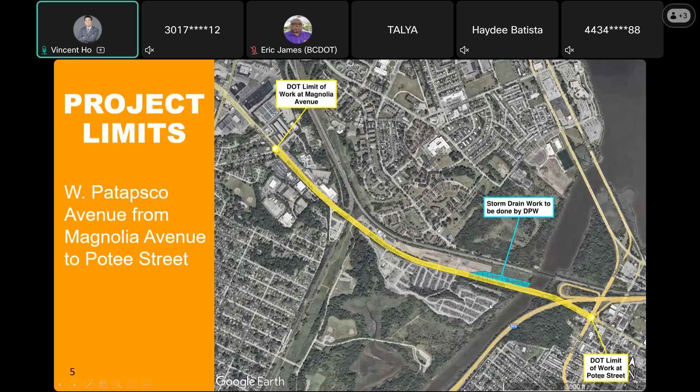There's a sister project being done by Public Works, just off the right of way - they're putting in a storm drain and an outfall, and we'll be connecting to that. We'll talk more about that later. That's off the city right of way, so it won't be part of the DOT project. But also included in that project limits, Public Works has a water line replacement that'll be accommodated into our project as well. The reason we do all this work at once is so we don't tear up the road three times, with three different construction phases and three different construction times.

The purpose and need: like I said, the basic purpose originally was to restore the concrete - there's a lot of joint problems and sometimes potholes. We also know there are drainage problems out there, and there's a new water line we're going to make sure can be built with our project. Also, when we were out there, it was obvious there was a need to accommodate pedestrians, but typically there's nowhere for them to go. We were going to accommodate them anyway, and then the complete street ordinance and design manual came out.

So that gave us tools to enhance what we were going to be doing. And of course, this road is on Baltimore City's master plan, it's on our bike master plan. So because of that, we want to accommodate bicycles. Anybody out there right now would know this is not a place where you'd want to ride your bicycle. We see people doing it from time to time, but there's a lot of fast speeds out there and it's not a protected space.

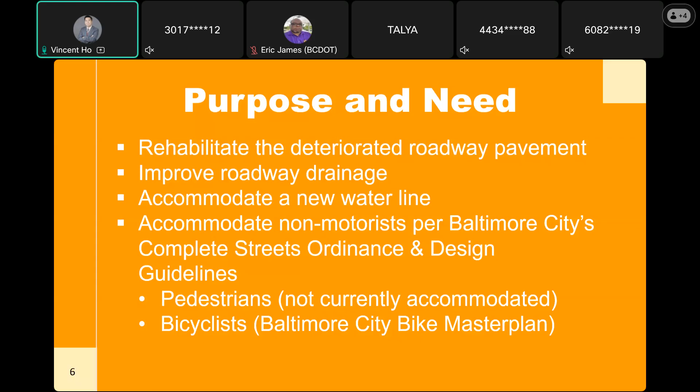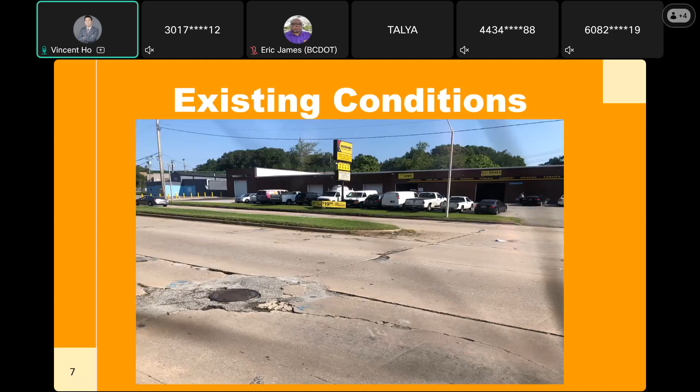So yes, we do know about the conditions. A lot of these photographs were from a couple of years ago. Again, that was the original purpose, was to restore the bumpy ride out there. This road was built in the early 60s, so it's like 60 plus years old right now. And we know the problem's just going to keep getting worse. So here's another problem, because these roads go downhill, they just get worse over time.

As you can see here, there's no pedestrian facilities. So somebody's either going to walk in the street or they create these little cow paths. Sometimes you do that if you have to, but it would never accommodate somebody in a wheelchair like that. So anything we put on, we want to make sure people with disabilities can have full access to the road as well.

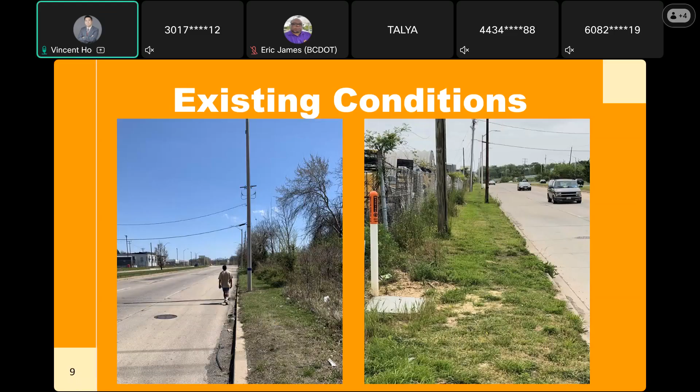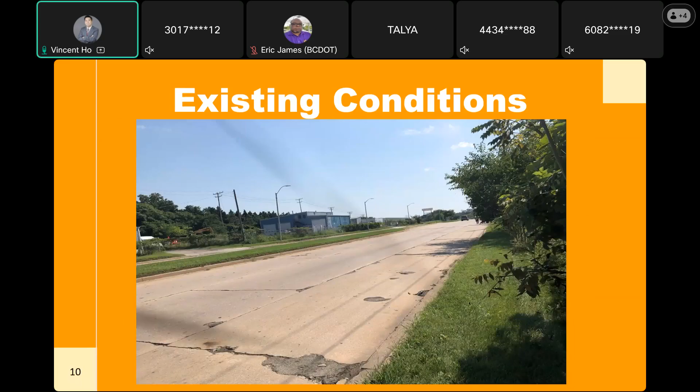So this is just another picture of the existing conditions here. When I was out there recently, talked about getting worse, there was some pavement upheaval on the eastbound farmost right lane between the light rail bridge and the bridge over the water.

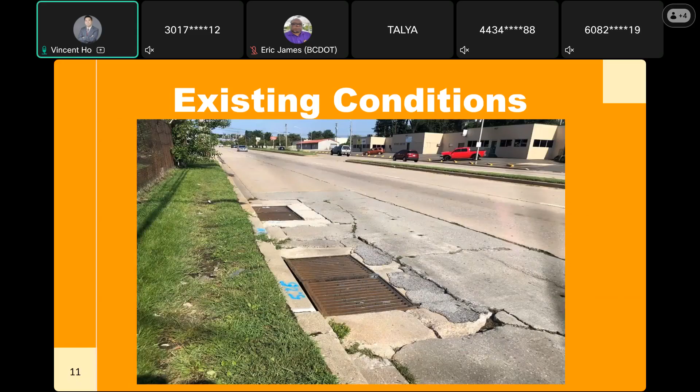Yeah, so that previous slide, you don't have to bring it back, Jamie, but yeah, it's a large part of our project will be adding storm drains, repairing storm drains, improving the drainage out there.

And here's another existing condition. There's an MTA bus stop right here, and there's absolutely no pedestrian facilities. So we're just dropping people off in the middle of nowhere. So we will work closely with MTA to make sure that we can integrate our sidewalk with their bus stops, because we don't want to leave anybody stranded.

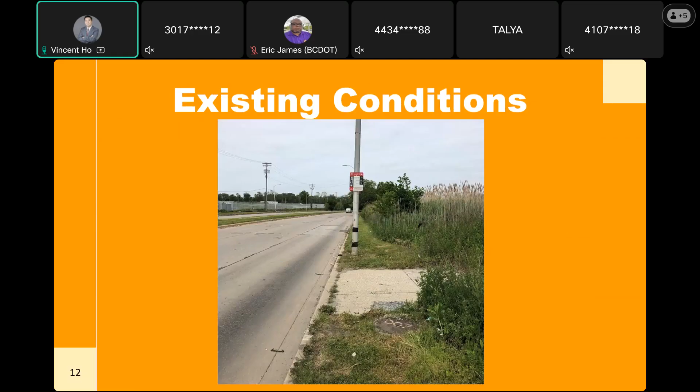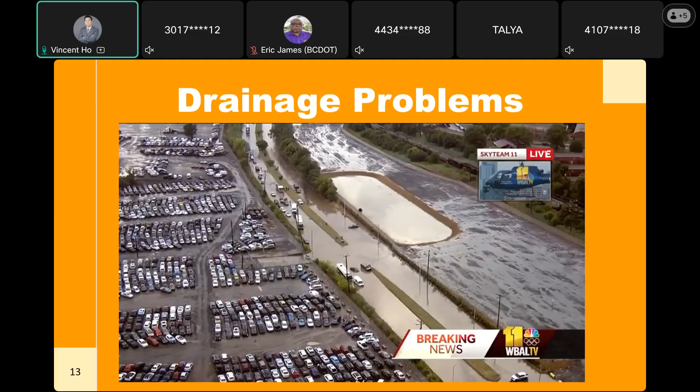All right, so the road was in the news not too long ago, but not for good reasons. There was a backup here. There's flooding that occurs from time to time, and that's a result of the existing road not having enough drainage, as well as there was an outfall that much of the road was draining to that has failed, and that was part of the reason why Public Works will be doing their own storm drain improvement project and sending the water to the Patapsco River.

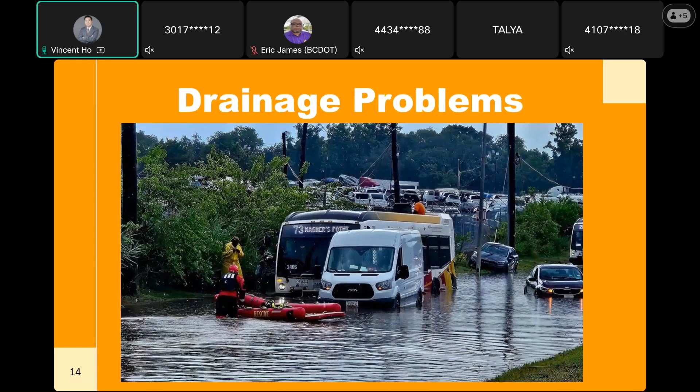And this is just like a worst case scenario, what happened earlier. They got the rescue out there and the water looks pretty deep.

So a couple of years ago, MTA installed a partial signal, and the purpose of this was for safety of their buses exiting the light rail station. But during our project, we will complete this so that it'll be an intersection that will accommodate traffic coming in all directions, as well as pedestrians. This really doesn't do it. There's no pedestrian facilities right here because there's not that much of a need, and it's really not accommodating people wanting to cross the road here.

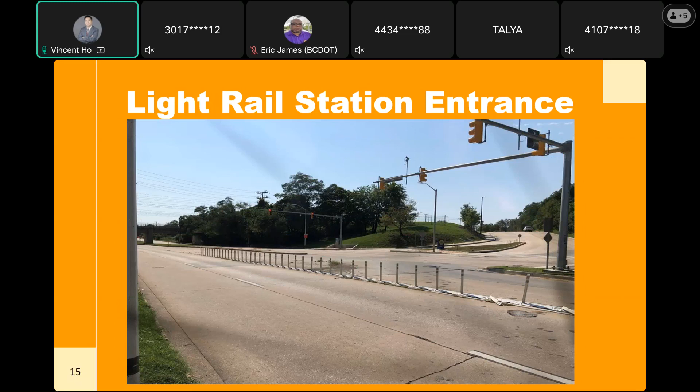All right, so the project says concrete pavement rehabilitation. Rehabilitation means repairing, replacing, modernizing, and sometimes upgrading. So that's kind of an all-inclusive word. And then beyond that, we're doing work often with the curbs where we can keep things in place, we'll do that. But then we'll be adding some street lights, some guardrail modernization, inlets.

I was talking about that - the ped lights, pedestrian lights in the commercial area. The commercial area is, as we define it, the area that's west of the light rail entrance. So there'll be some ped lights put in there, like the acorn lights, because that part of it, the adjacent land use is different. The rest of the project is more industrial or just undeveloped.

And then, like I mentioned earlier, the traffic signal at the light rail station, that's going to be completed. And then we'll do everything we can to accommodate pedestrians. There's going to be a shared use path that's going to be about 10 feet wide that accommodates people on scooters or bicyclists or people just walking, etc. And then that'll also be separated from the main part of the road. STV will show later a typical section of how that plays out, so there's some separation between where the road's going to be and where the pedestrians and bicyclists are.

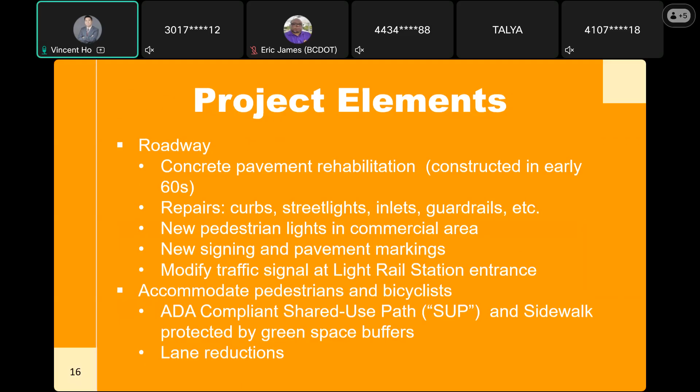All right, so this job has a lot of, it's a big team here. There's a lot of coordination going on.

I mentioned earlier, DPW has a major drainage system, and this is going to be similar to the project they did over in Cherry Hill, which is like a sister project for them, as well as Public Works is also replacing a 20-inch water line that runs down our project. And then MTA hopes to put in a pedestrian bridge at the light rail crossing.

So to facilitate people coming back and forth, because now I think some people actually cross on the tracks and we want to improve that safety. DOT has another project, it's an early design, hasn't advanced too far, but where our project ends at Potee Street, east of that, further to the east, they're looking at some options to improve the user experience.

Our bridge section also has a rehab project for the bridges that span over the Patapsco River. So while our project spans over it, we'll be doing the minimal amount of work on the bridge and instead doing the concrete work on either side of it for right now.

Copart, they own most of the property between the light rail and the bridge itself. They had some redevelopment come in recently, and we'll be tying into that.

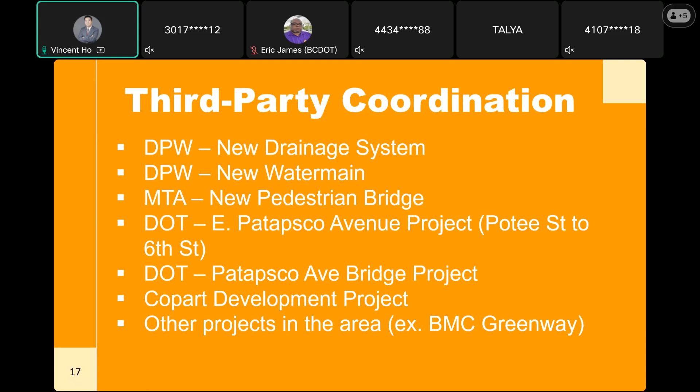All right, so the last slide I'm presenting right now is some facts about the roadway. Unfortunately, we can't widen the road. That's not an option. Our right-of-way goes back like 5 to 6 feet behind the existing curb.

And at that point, we touch base with private property owners. We do everything we can to minimize impacts of private property owners. Sometimes it's unavoidable. For example, just some sidewalk work or driveway entrance. Sometimes the work spills over.

So if you're a property owner and you get a letter from us requesting a minor adjustment agreement, you can just call us and we'll just need to work that out with you so the project can progress.

The cost, it's already very expensive, so we're looking to minimize that. There are some environmental impacts because we're near the critical area, tidal waters, we gotta get E&S permits. The state has a new general permit for projects that disturb more than 1 acre.

The roadway overcapacity, this was built before there was going to be the Baltimore Beltway, so there's not a need for 3 lanes. If you're out there right now heading westbound, you can see that one of those lanes is already blocked off. And so we'll convert the 3 lanes each way to 2 lanes, and that was supported by a traffic study that showed that would work.

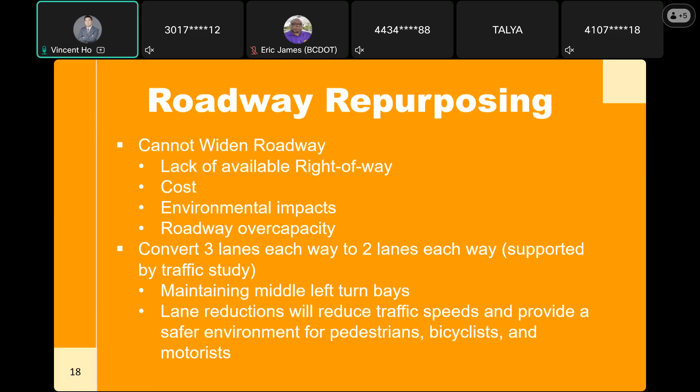Thank you, Michael. As Michael said, my name is Vincent. I'm with STV, the design consultant for this project for the city. And I guess for the next few slides, I'll talk about a little bit more of the finer details of what we are proposing now that you've kind of seen the existing conditions, the kind of issues that are probably pretty evident on Patapsco Avenue.

So before we do that, just a little bit more detail on the existing roadway. This is what we call a typical section or a roadway section, just so you guys know. As Michael was describing, this road is a 6-lane road, 3 lanes in each direction. And the lane widths are approximately 10 to 12 feet wide, with the outside lanes being 10 feet and the interior lanes being 12.

As Michael was kind of saying, you can kind of see here, today out there are no sidewalks. There's nowhere, if you're a pedestrian or bicyclist, there's nowhere to go except to be in the street. Other things to note is there's a big raised median in the center. For the most part, a 16-foot median, with the exception of locations where a left turn lane might develop.

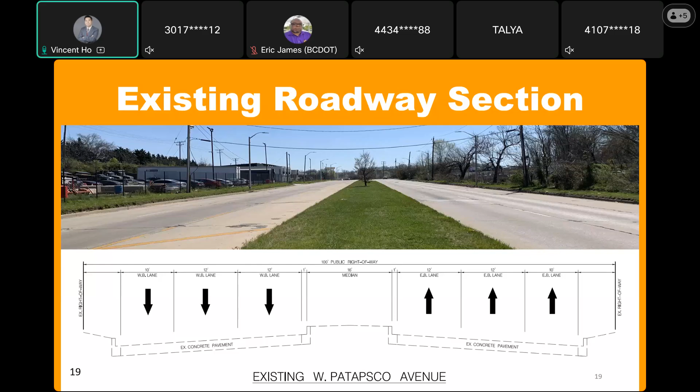So because of that, just to reiterate some of the stuff that we will be proposing on this project for improvements to the community.

We're going to rehabilitate the roadway, whether that means full reconstruction or repairs of the concrete pavement, or a combination of both. We've also talked about repurposing—specifically, a lane reduction, taking out that outside lane, converting a 6-lane road into a 4-lane road, 2 lanes in each direction.

With that comes the opportunity to pull the curbs further in, creating more real estate for things beneficial to pedestrians and bicyclists—like a separated shared use path and continuous sidewalks, which are lacking today from Magnolia all the way to Potee. These facilities will be separated by green space buffers, essentially grass buffers, which also helps with pavement reduction. There's a lot of pavement out there, and it never hurts to put a little more green space back in.

And finally, there's going to be landscaping at select areas, mainly trees located within the median. There's plenty of space, provided that it meets sight distance requirements.

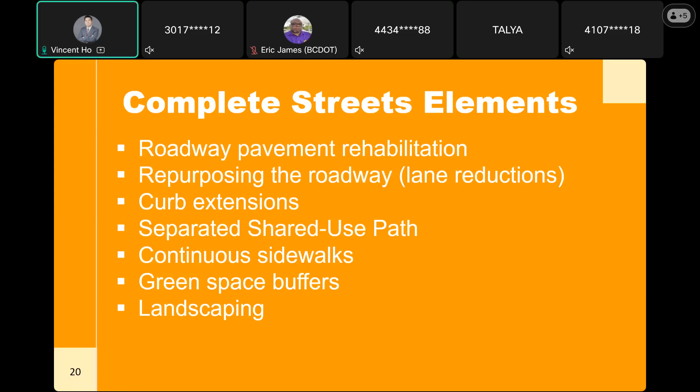So to give you an idea of what that actually looks like, here's the proposed roadway section, or typical sections of what we're going to propose. The project can be divided into two sections: the westerly limits at Magnolia up to the light rail station, and the second half from the light rail to Potee. For the most part, it just kind of gets mirrored, so I'll talk about the first section first—Magnolia to the light rail station.

As you can see here, the existing curb is right here—that's the existing curb. We're pulling that forward, and all this space is now able to be utilized for repurposing, in this case for a shared use path facility. On the other side, it's going to be an asphalt sidewalk, and we're simply overlaying the existing pavement to provide that. It will be ADA compliant—there are certain slopes and grades you have to meet for that. Also, to visualize what I was talking about earlier, you can see it better now.

There's also going to be a grass buffer to separate facility users from motorists and traffic. In addition, on the eastbound side, we are doing a full pavement reconstruction, meaning we're going all the way down to the subbase, whereas on the other side we're simply doing concrete repair where we see fit.

The only quirky thing about this—typically when we design roadways, the outside lane is usually the wider lane, where trucks or buses are. But as you can see, there's actually a 10-foot lane on that side. The reason is because on this side we can control it—it's going to be brand new pavement, so we can control where the joint lines are. But because Patapsco Avenue is concrete, not asphalt, there are existing joint lines already out there. So we kept that where it is, just so it wouldn't be offset from where the striping white edge line or the skips would be.

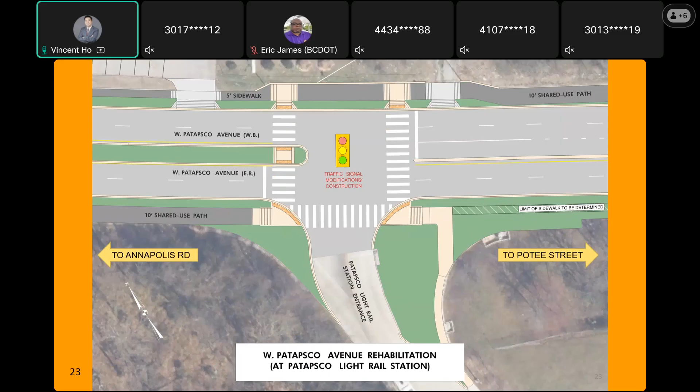The next image here - and we're making our way eastbound, by the way - as we get to this location, this is just before the bridge over the Patapsco River. We are not proposing anything on the bridge itself, with the exception of maybe some vertical delineation to continue the protection for the shared use path across. But we are not doing any rehabilitation or concrete work or anything like that. In fact, there might actually be a dedicated bridge project by the bridge section at DOT for that.

Something to note about this - up to this point, east of the light rail station, we're working in coordination with DPW to improve the drainage here. That includes a new trunk line, so there's going to be a lot of work underneath the roadway. But up until this point, the trunk line does not go through the bridge. It's going to peel off probably where the 10-foot shared use path is labeled there, and then follow parallel with the bridge until it hits the Patapsco River, where it will outfall.

Lastly, this image here is the easternmost limits at Potee Street. This is where we'll tie back into Potee Street. We were scoped to just go up to Potee Street - we're not doing any signal work here. The signal here was upgraded to a mast arm, I don't know when, but not too long ago, maybe 8-9 years ago, so there wasn't a need at the time. But because we are changing the ramps here, we will do slight modifications to the push buttons and the countdown signals. But we are not going any further than Potee, which is the eastern limits of the project.

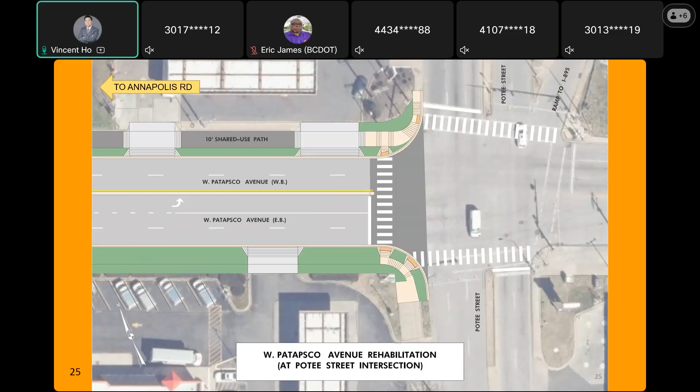Just to reiterate some of the stuff that I've talked about.

We're going to introduce pedestrian friendly traffic signals, primarily at the light rail entrance. All the pavement markings and signs, especially if they're not in compliance or if they're old, will be upgraded. Crosswalks are going to be those high visibility continental crosswalks throughout the project. Street lights throughout the project limits will be upgraded to LED if they're not already. The old high pressure sodium dingy yellow lights, and even some LED lights that aren't up to code now, will be upgraded to the new ones as well, if needed.

Michael alluded to this as well. In the commercial area, from Magnolia to the light rail station, we're going to have dedicated pedestrian lighting.

Obviously, the drainage improvements are a big aspect of this project, working also in coordination with DPW. Repairs to curbs, inlets, things that need to be replaced.

Related to that, DOT right now is exploring the idea of reducing the speed limit, currently posted at 40 miles per hour out there. So that's in the works. No promises necessarily, but the idea is to calm traffic on this project.

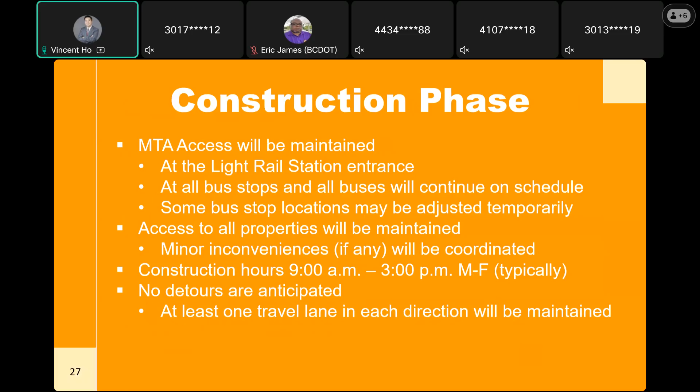Lastly, the goal is not to have any detours on this project. We're going to try to maintain one lane in each direction under construction. To give you a visual, the goal right now is to have construction done in 2 primary phases.

The first phase is we take one half of the road - let's use the eastbound side as an example. We'll construct all that, it will be closed to traffic, and construction workers will work on that side while maintaining the other side converted to one lane in each direction, 12-foot lanes. Because there's no sidewalk today, we'll also drum off a 5-foot path so that if people need to walk, at least it's delineated, which is better than what we can say today.

While they're working on that, once it's completed, we basically shift sides. The side we just completed opens up with a temporary one lane in each direction. Once again, we don't need to drum off any access for pedestrians because a shared use path or sidewalk will already be constructed. Then under construction, we'll finish phase 2 on that side.

The benefit of this is naturally, when you close off one side, that grass median is already a natural barrier. Otherwise, if we did one side at a time, we'd have to set up concrete jersey barriers, and that could add up - at the end of the day you might have to relocate it. But this way, you can set it up for long-term construction. So that's a benefit to this.

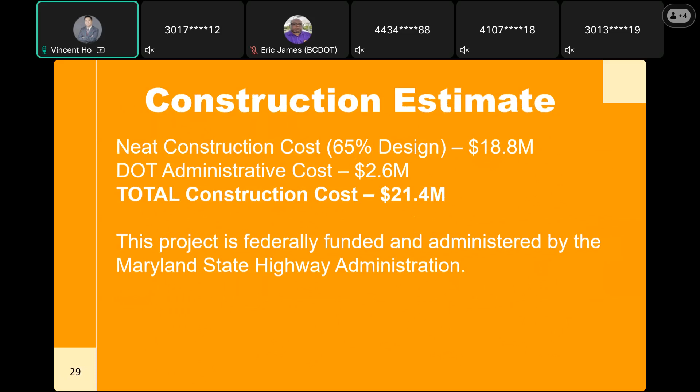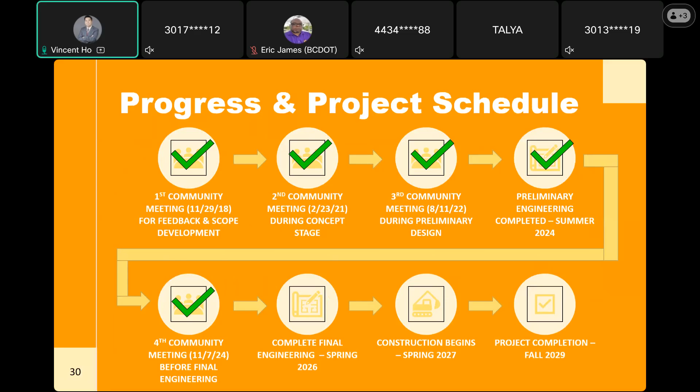We had a lot of need to reach a consensus on exactly what we're going to do, which we've done. This drainage system, our project will drain into what Public Works is building. That's why it's essential that their system gets built first, so their contractors are out of the way. When we come in, we don't have people fighting for space, and when we put our pipes in, we have an outfall to connect to.

Environmental permits, NEPA - that's a federal requirement, the National Environmental Policy Act. That's to make sure we've dotted the i's and crossed the t's on community outreach, environmental impacts, and alternatives. So we've got that process done.

The challenge is, again, complete streets is kind of a new thing, involving state of the art, state of the practice. So people have different interpretations, new things are coming in. So that's something we're implementing.

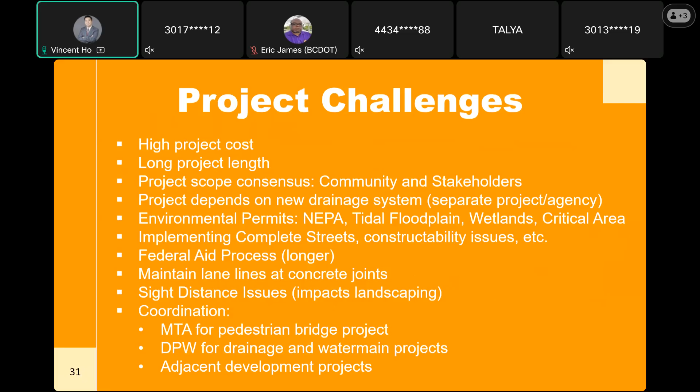Coordination is always very important. We are reaching out to MTA for the pedestrian bridge and other issues with them, like the entrance, as well as where the bus stop's going to be. And we coordinate tightly with drainage and the water main projects from DPW, and then some of the other previous projects we mentioned, like the BMC Trail or whoever else is out there, or what Copart built.

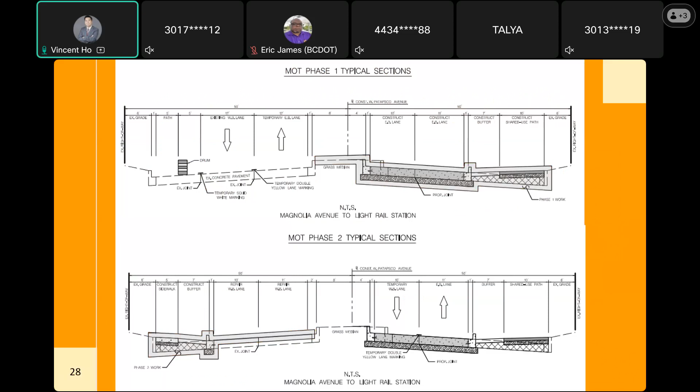And speed limit reduction consideration - I have two questions. I was wondering if you could expand a little bit more on that, because the problem is it's just a long, straight drag strip, and people know that and use it that way. I've seen two horrific crashes there in the 20 years I've been a Brooklyn resident.

And my other question is with regard to the shared use path - do you intend on putting up any bollards so that people don't just cross it and zigzag in and out of there? Because if it's level with the road, they will.

So about speed, during construction, the speed limit will be expected to be 40 miles an hour. After construction, it could be lowered, maybe 30, maybe 35 - we'll have to coordinate with our traffic people on that. But certainly, no matter what the speed posted is, if people ignore the speed, that's a problem, and that's a difficult thing to address.

That's one reason why we typically have narrower lanes than we used to. The push in the past was to have a wider lane width, meant to give like a buffer, and it has some advantages - there's more room for error - but narrow lanes do tend to make people more cautious and slow down. But it is kind of a straight shot, so we are concerned about people driving too fast. It's easy to do - you don't even pay attention, you got the music on and everything's good, and all of a sudden you realize you're going 60 miles an hour.

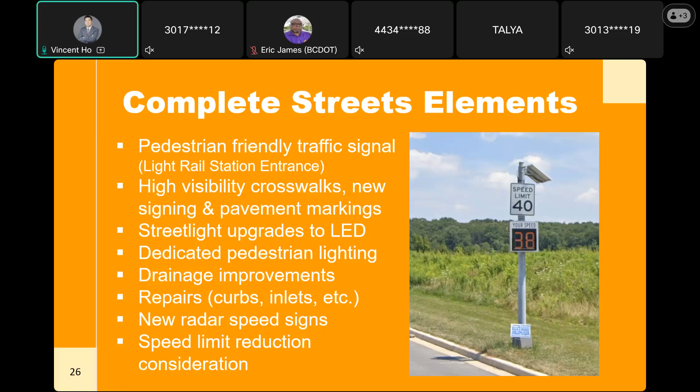That's one of the reasons why we probably put two of these in. And then we do have the flashing beacon - if you're heading westbound, it's a little bit east of the light rail bridge. I don't think we'll have bollards; we'll put curbs up, they should be 8 inches.

It's not uncommon to see people doing 80 miles an hour on that road. It happens, and unless you do something to eliminate the perfect straightness of it, I don't know that this is going to work. It's going to work for a lot of great things and I appreciate it - I'm thrilled to see it - but as far as reducing the speed, I think there needs to be more thought put into that.

I'm not saying... yeah, yeah. Okay.

So there's engineering design, and then there's human nature. Engineering and design can be improved, and we can learn about construction, but fixing people is a lot more difficult. A lot of times, if this was a newer road, we probably would've put some more horizontal curves in, because that does tend to slow people down as well. But this was built primarily before we had the beltway, just to get from A to B as fast as possible.

Yes, I don't know how many trees we can put in. Sometimes there's utilities in the way and the tree branches can't extend into the street, but yeah.

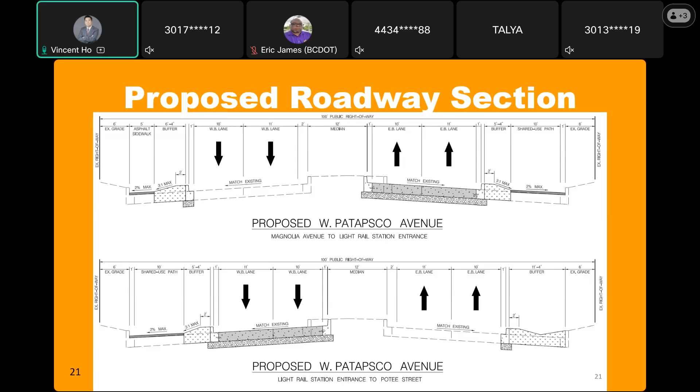Yes, hi, good evening, I'm Manmohan Singh, section manager with Department of Transportation Engineering Construction Division. I just want to highlight one point that Michael mentioned in his presentation about the minor adjustment agreements with adjacent property owners. That's a very crucial step. If any business or residents attending today, or anybody with properties adjacent to Patapsco Avenue within these limits, will be receiving a minor agreement, a very basic agreement, that we are coming next to your property, or in some cases like driveway reconstruction, which the city will pay for and do on its own cost. There's no cost to the property owner. We may need to enter your property during construction to redo or reconstruct that driveway to make it ADA compliant and grade compliant, but we need that agreement. Without it, we cannot move this project forward to finalize design and construction. That's a very crucial step, so please spread the word.